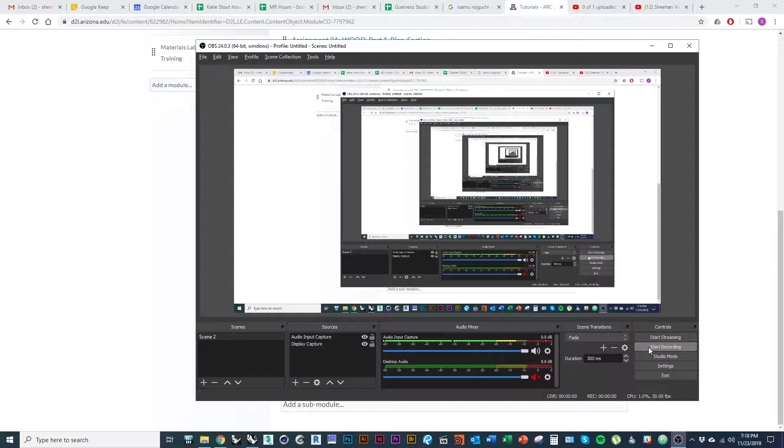Alright, so this is part 5, the last one in the series. Basically what I'm going to walk you through here is how to lay out everything else with the laser cutter.

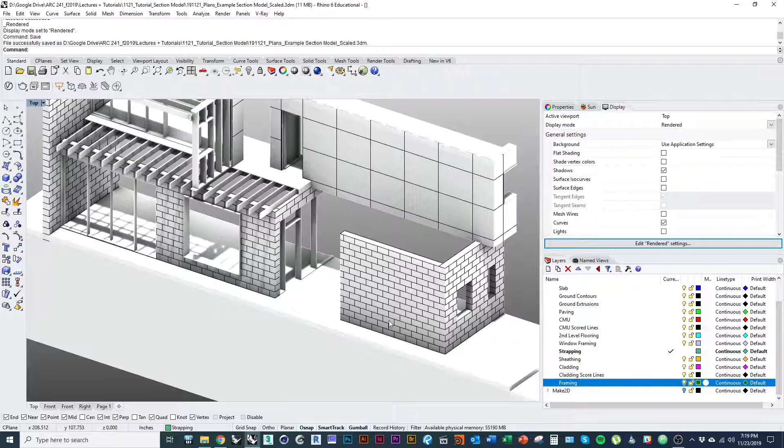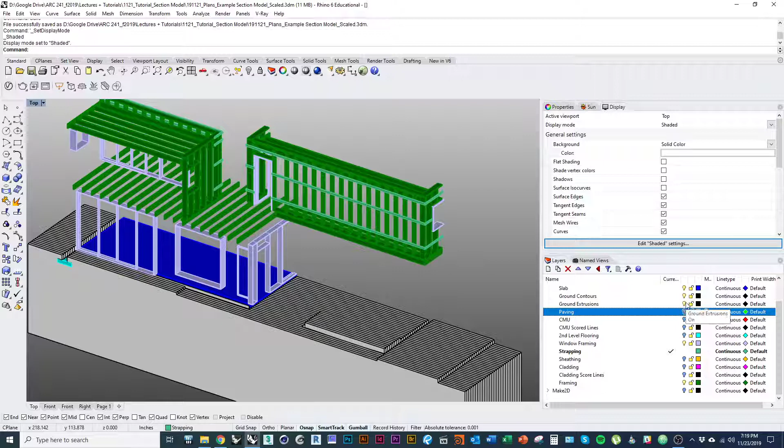As I mentioned a couple times in the past few videos, things like framing, the wall and ceiling and window framing, even the strapping - those are all things you basically just want to do by cutting sticks of a certain dimension and assembling them into frames, keeping them as square as possible. But in general, you're going to save tons of time by not trying to cut all these pieces out and keep track of which one is which length. So I highly recommend you just buy certain size sticks and cut them manually.

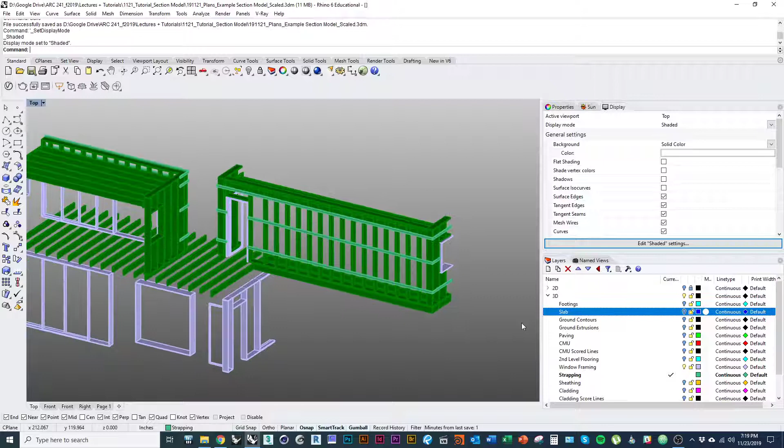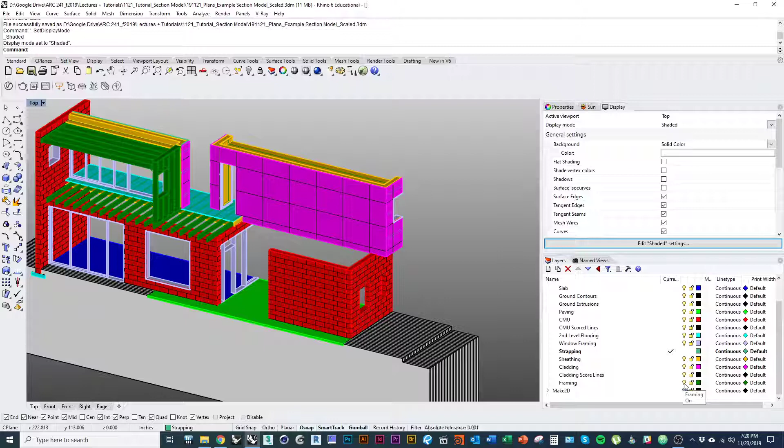So what I'm going to cover then is how to lay out everything else. Now I already covered how to lay out the contours that form that cardboard base, and I just want to reiterate that for anyone that might have missed it from the first tutorial. So I'm going to turn off everything that I'm not going to lay out as part of my framing.

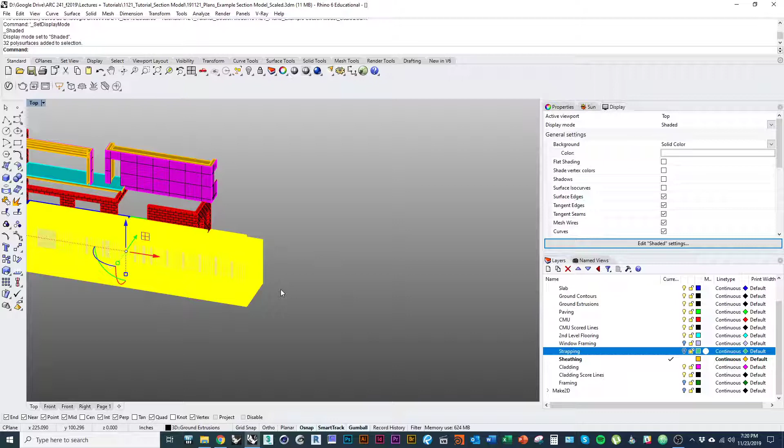And then strapping, where's that? Okay. Basically, most of what I'll do here will be just continuing in the same methods. So I'll show you a couple of different examples, but I'm not going to do every single part because that would just be massively repetitive.

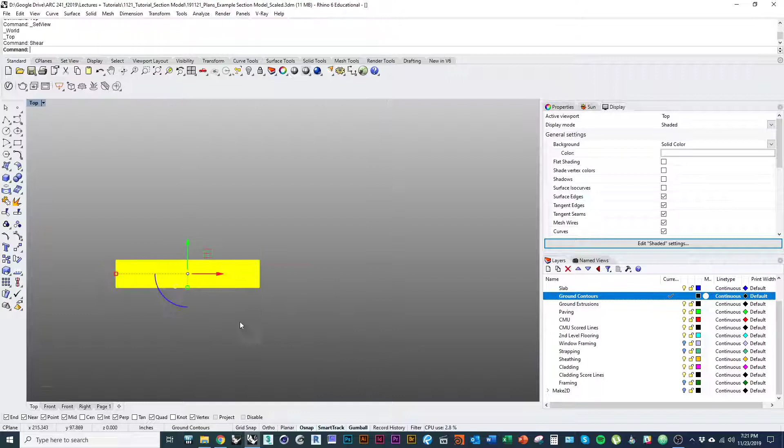Alright, so let me just reiterate how to do these ground contours. So I'm going to grab those. I'm going to use the command shear. So let me make a copy first, and again, I'm going to use the command shear.

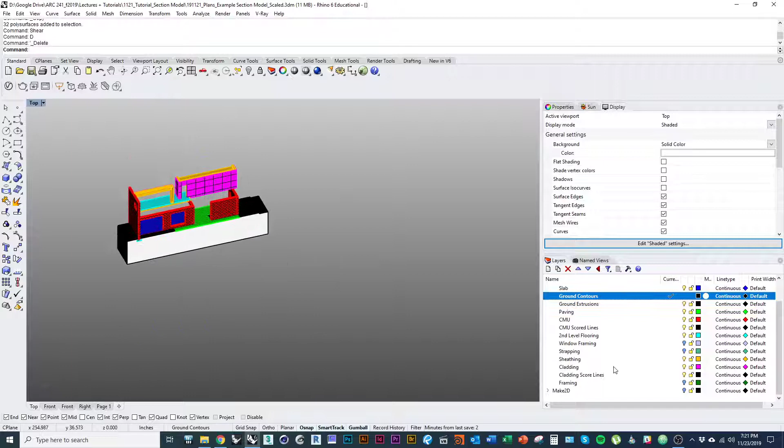So looking at it in top view now, I'm going to draw a line from one corner straight up, and then I'm going to start to... oh, I'm sorry, I did do this wrong. So let's see if we kept our surfaces or our outlines. I guess we didn't. So let me just do a quick thing here.

So this is why you want to save the lines that you make the extruded surfaces from.

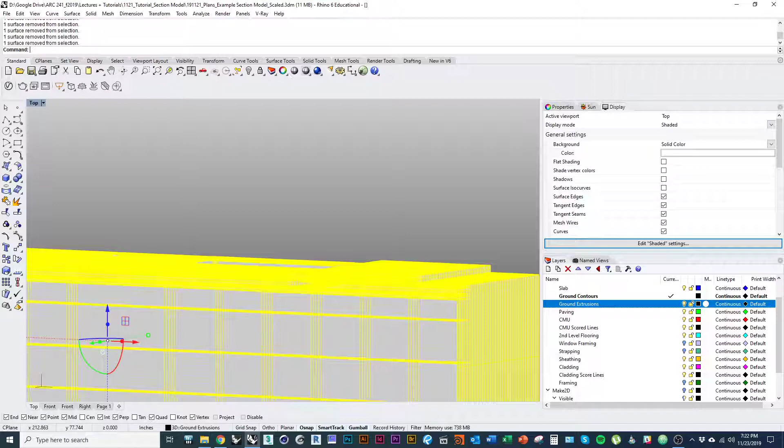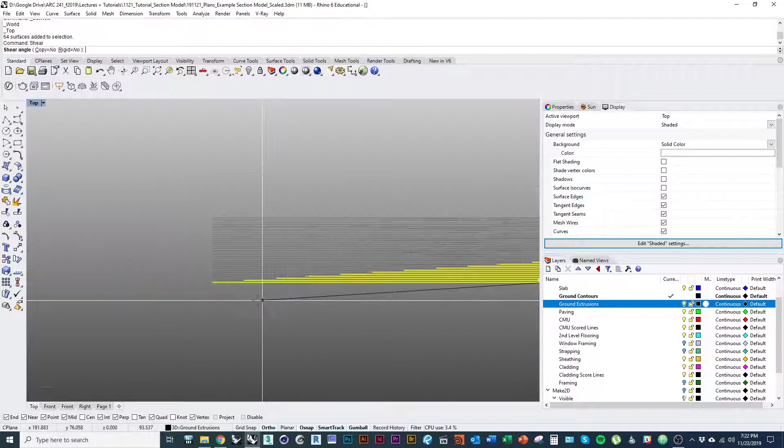Alright, but basically, if you had those things as 2D outlines, or in this case just the surfaces, then you would grab everything, use the command shear, go to one corner, drag a line straight up and click, and then drag a line straight out. What we're looking for here - and I'm holding Alt on the keyboard to avoid snapping to anything.

But at some point I will have sheared them far enough apart that they're not overlapping at all. And because they're only 2D surfaces, I'm not distorting the geometry, right? Like the direction of the shear was perpendicular to those 2D outlines.

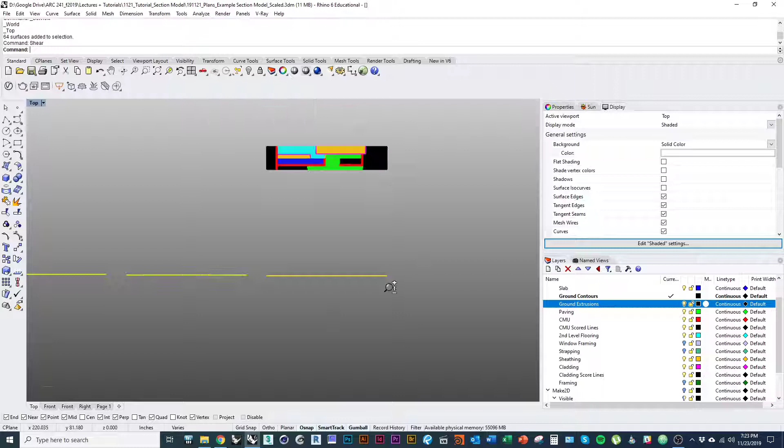And so now if I go into front view, I can pretty easily just say okay, make 2D. Again, I'm in front view. Oops, I should have done that properly. So obviously, everything you make 2D will only show up if it's in frame. So zoom out far enough that you can see everything, then do a make 2D.

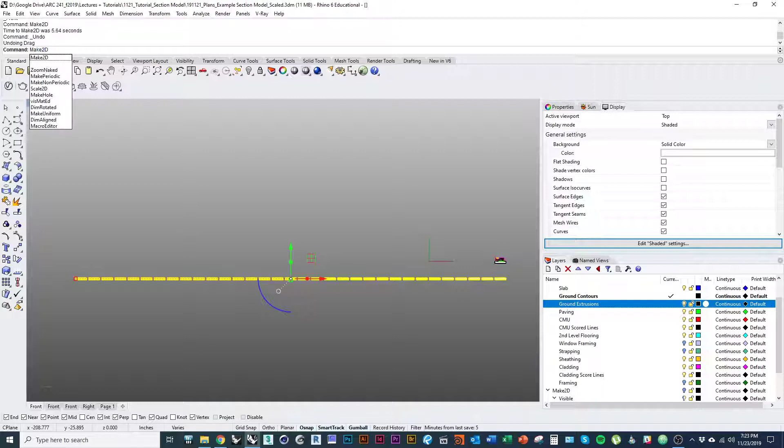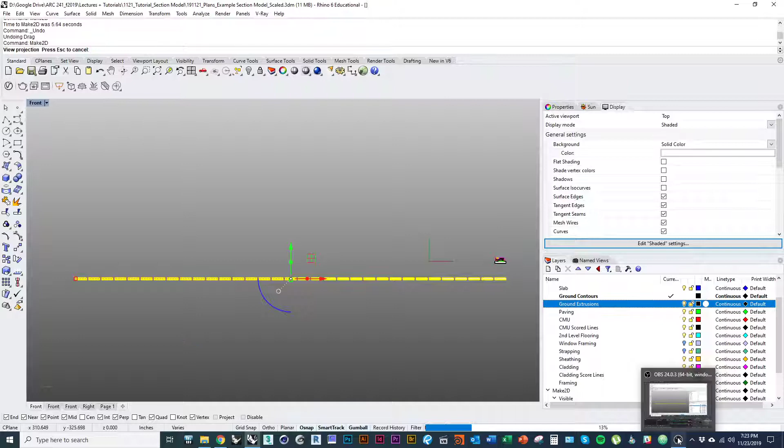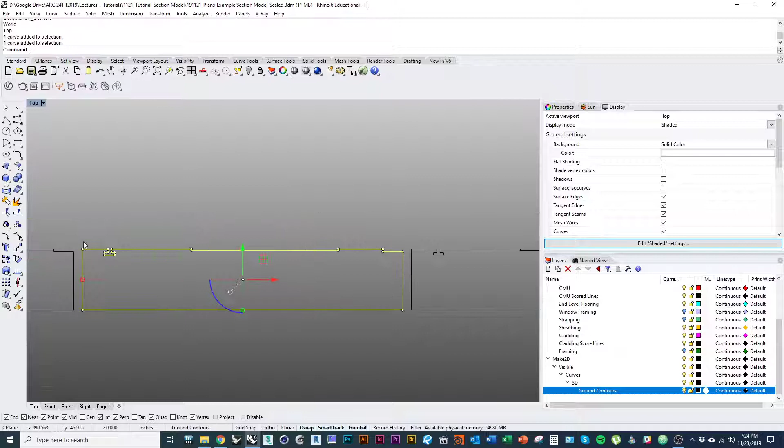Okay, and then under our layer make 2D, we're going to see those things. First of all, they're outlines, right? So there's 2D lines here. They're in top view, which means we can print them, and they're closed outlines, which is going to make our laser cut happen a lot faster and more efficiently.

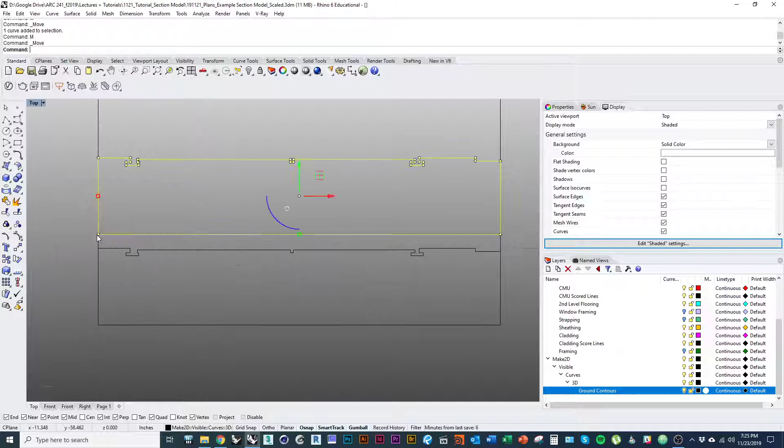And then what I would do also, of course, is make maybe a 32 by 18 window, and just start to lay them out in sheets. And you can even actually label them if you want. So I would just use the command text. I would say this is - I'll just use numbers, because that'll be the least amount of cutting. And then I'll just label them somewhere down there where I don't have to.

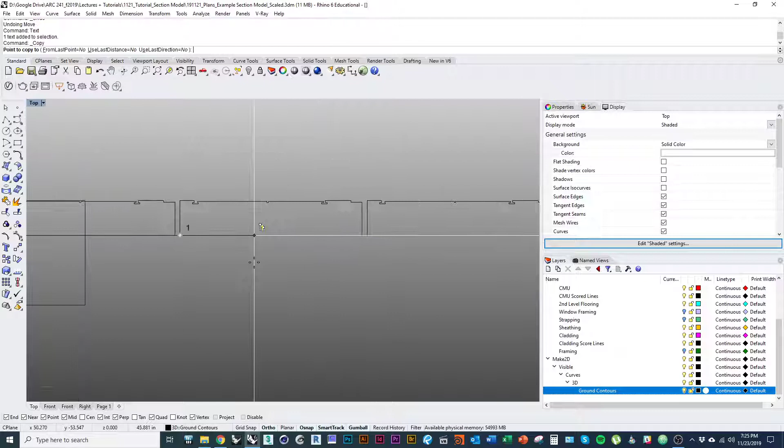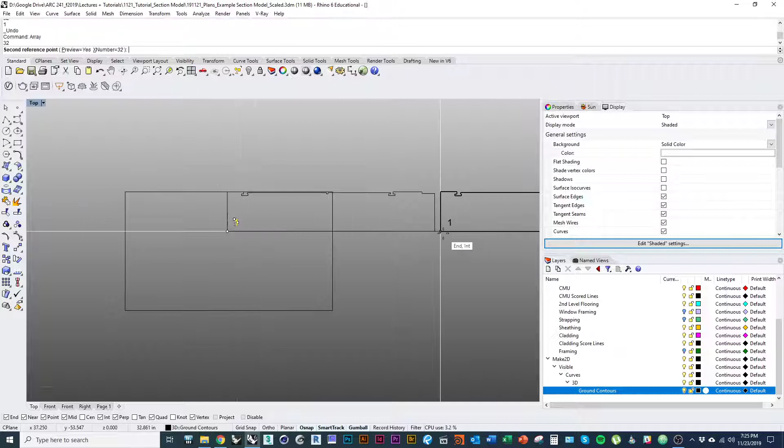And I can even actually array this. So in the X direction, I would want 32, obviously - that's how many layers I have. Oops, I didn't click, I messed up there. 32 - snap to the corner of one and then to the corner of the other. And then you could go one at a time, just double click on it to edit it. Shouldn't take too long.

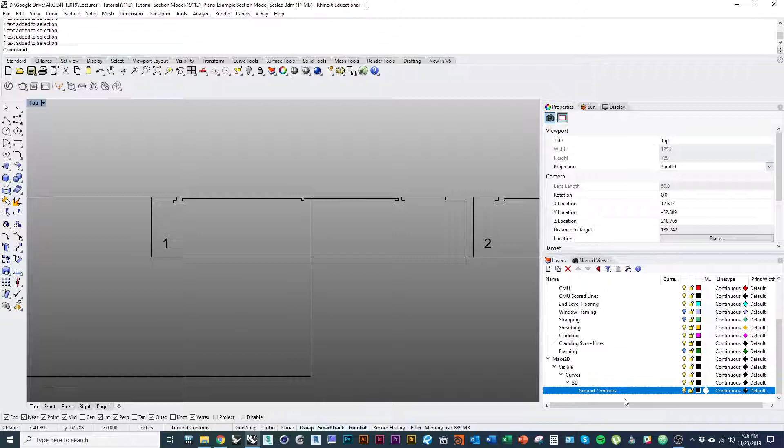And then what you would want to do is come back. So I'm sure you guys are aware by now that cutting on the laser cutter has to do with the colors that you use to define your lines. So I could set my outline to some color, and then I also would want to set my numbers here to a different color.

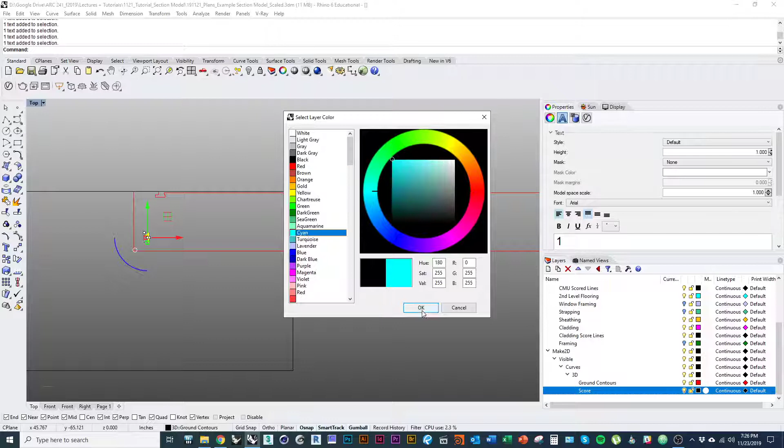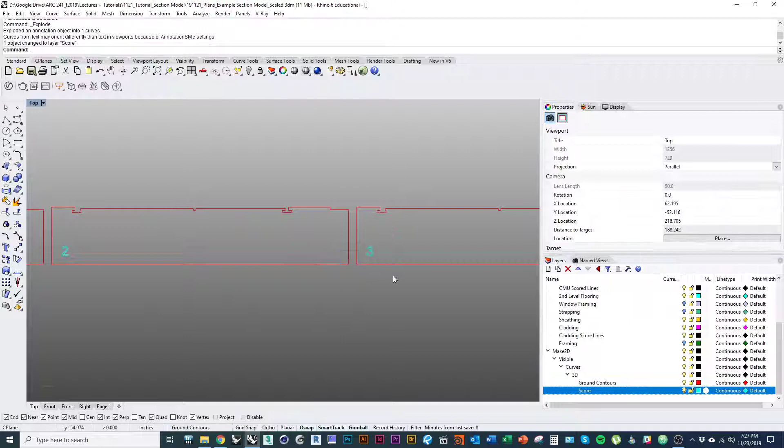So I'm going to make a new layer, call it score, set it to one of the colors that the laser uses. And then when I have these texts all defined, I'll just go in here and explode them, and then put them on that layer. That way I can set different settings for the numbers, and I can score those, just do them fast and kind of etch them into the surface without cutting them out.

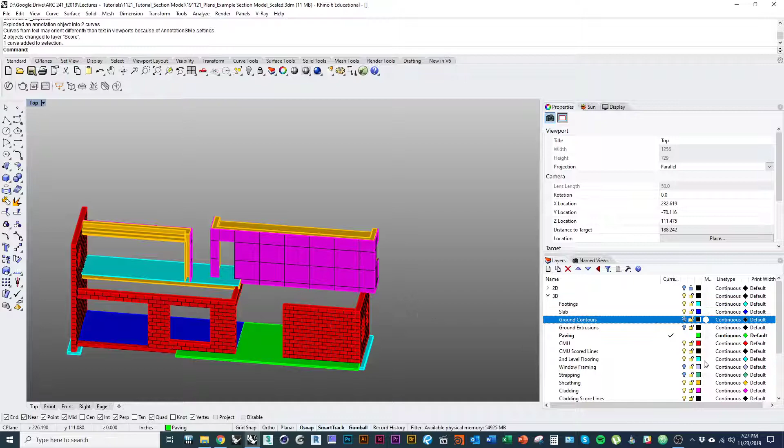All right, so that's the best kind of trick I know for laying out that type of base, those contours. The other thing I would say, for the most part, I would just kind of go layer by layer. Now, some of these things are going to be harder to lay out.

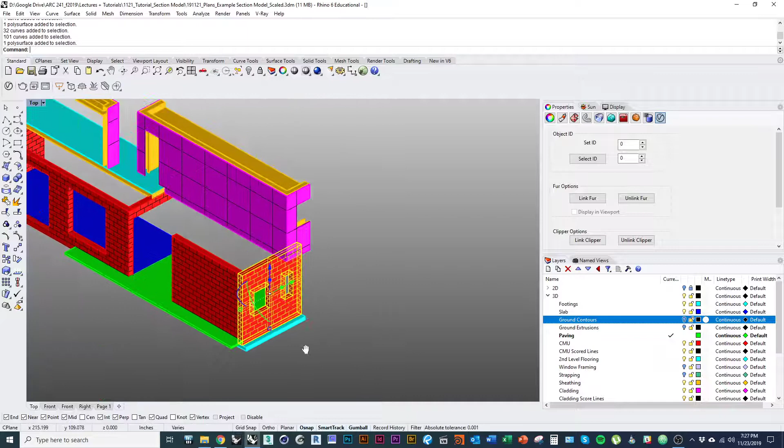Probably, okay, let's talk about these ones with scored lines on them. So what I would do if I had that, for example, and hopefully you remembered to group it when you drew those lines, but I would go object by object. I would use the command isolate, and then I would set my view to a projection where I can see just that object and the lines that I want to draw on it.

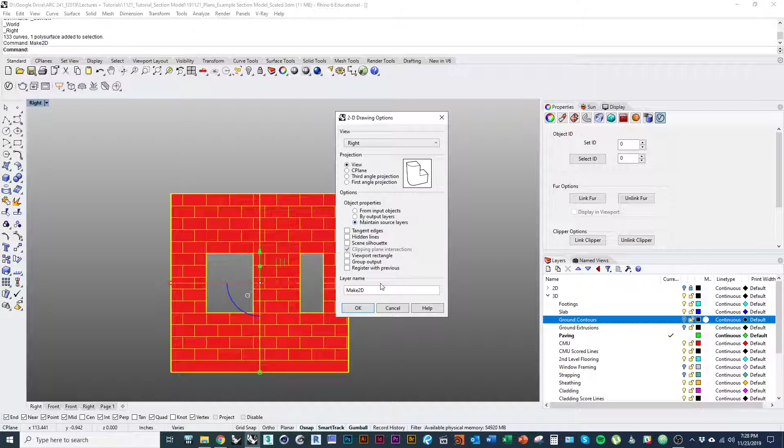And again, I would just go make 2D, and make sure I hit maintain source layers. And that's the fastest, easiest way to take something that, first of all, is a 3D object, and make it 2D. And second of all, has a lot going on, a lot of lines and stuff like that.

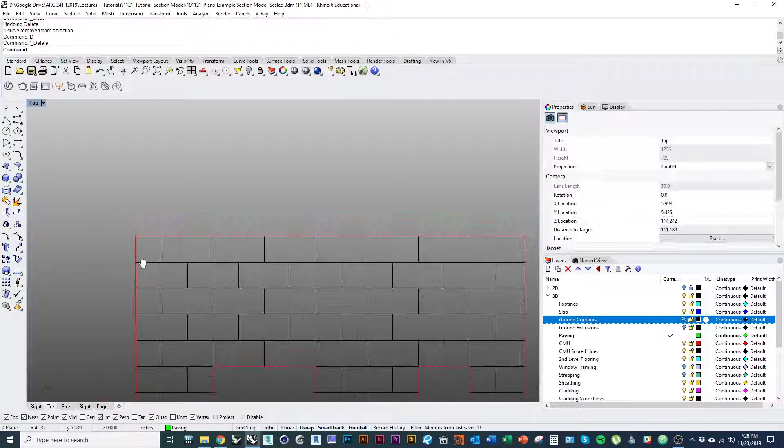You may find you still have to kind of clean a few things up, but shouldn't be too much of a big deal. And then you do want to be careful you don't have duplicate lines or anything like that.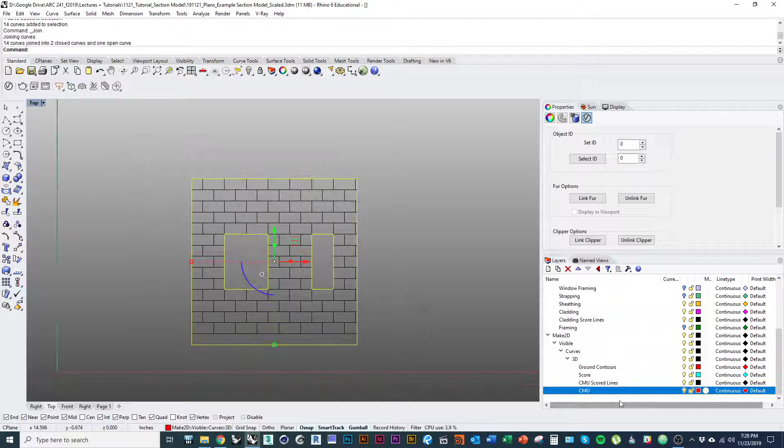And then, like before, I would put these on a separate layer. So I could go in here and just go select objects, join that. I want it to be red, so I'll keep it red. We don't have to put it on a separate layer, right? I misspoke. But we do want to give it the right color so that we're cutting it in the most efficient way. So I would go one by one and lay them out like that.

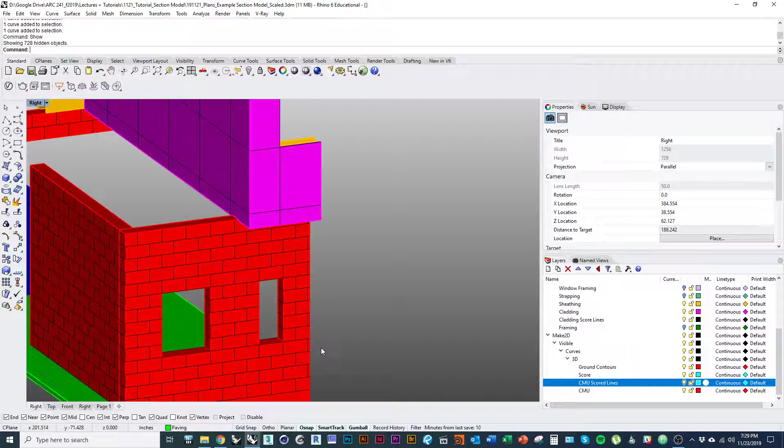Hit show to bring everything back. I'll do this surface as well. Let's go with cladding, score lines, invert, oops. Whoa, did not mean to do that. Select objects, isolate. All right, let me hide the rest.

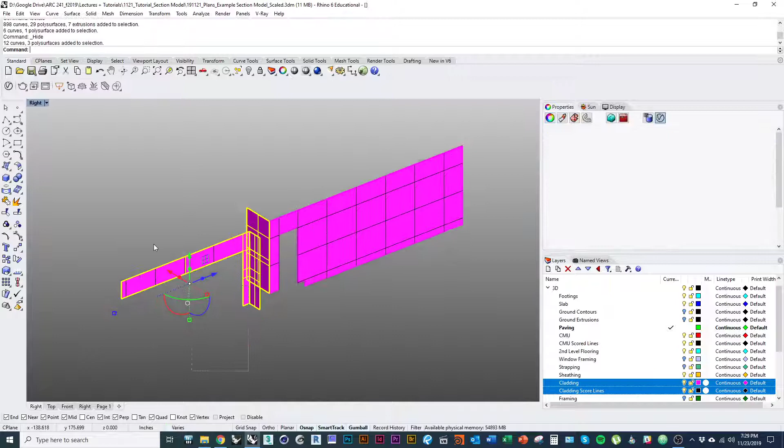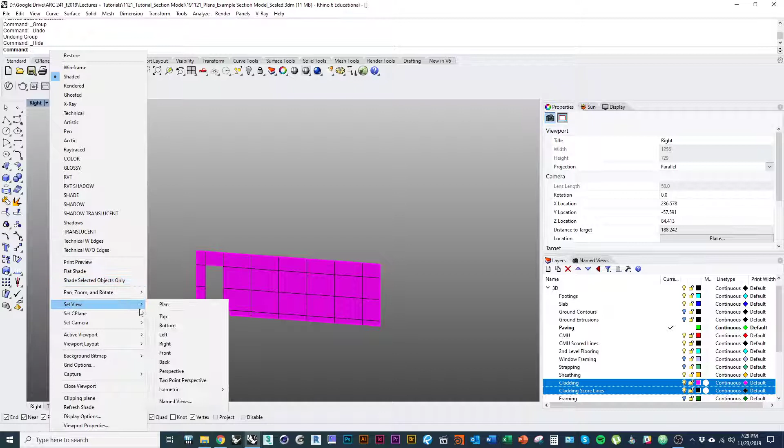So again, I would just go object by object and make 2D basically. I could go, and I should also point out, you really want to make sure that you're not looking at something backwards. For example, this is the outside face of this geometry, and we can easily make it 2D from here, but then our score lines would be on the wrong side. So I want to make sure I'm looking at it from the right side. There we go, okay. And again, make 2D.

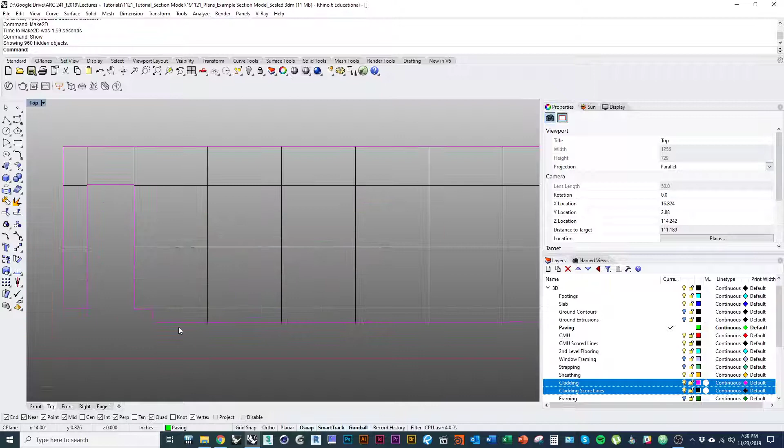And like I said, I would keep my layers all the same. In other words, don't put everything on like cut, score - don't put everything on the same layer. Just change the colors so that I can be sure I have all the parts that I need and so on.

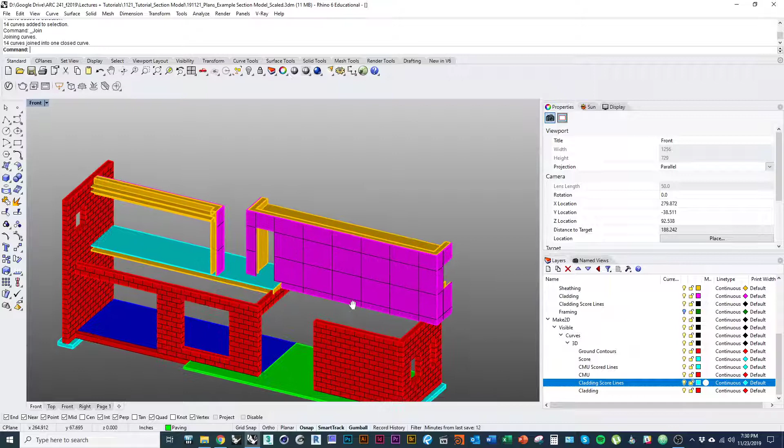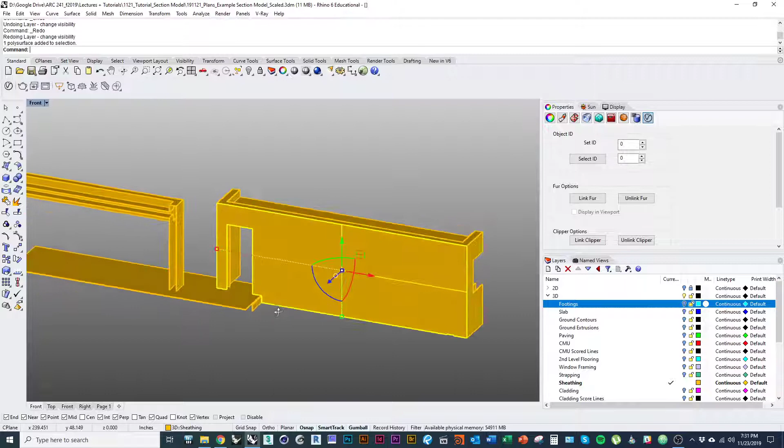All right, and then finally, let's talk about the sheathing a little bit. That's probably your most complex kind of layer that you need to lay out. Everything else I would pretty much just do the same. But this one, because there's so many different little surfaces, it's going to be really hard to go one by one and do make 2D and all that stuff. It's going to be a real pain.

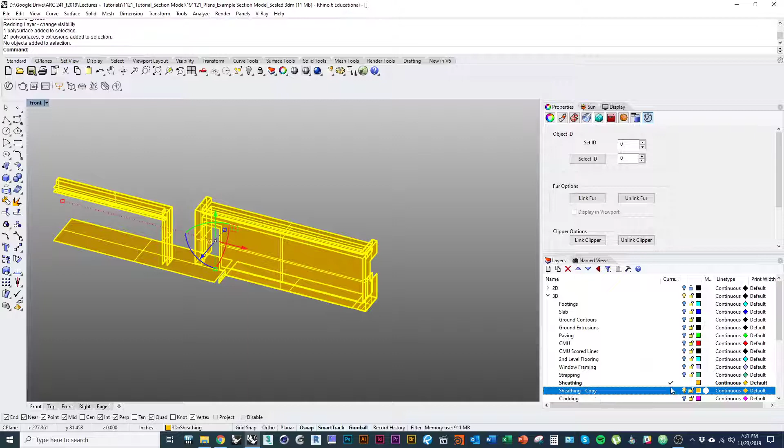So what I would do instead is basically make a copy. So I'm going to select these objects, I'm going to just duplicate the whole layer. Select sublayer, duplicate layer and objects. So I'm going to set that as my current, and I'll just change the color a little bit so I can tell the difference. All right, and then I'm going to explode everything. So we modeled everything with a thickness, obviously, so we could kind of sort out how the corners would go. But then basically what I want to do is reduce everything to one surface or one outline.

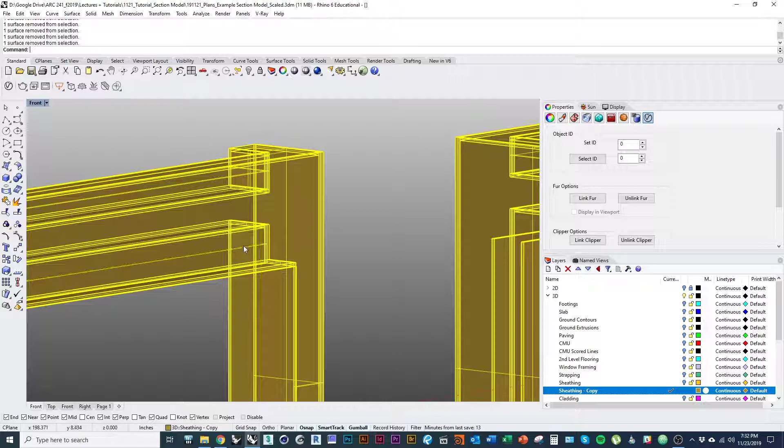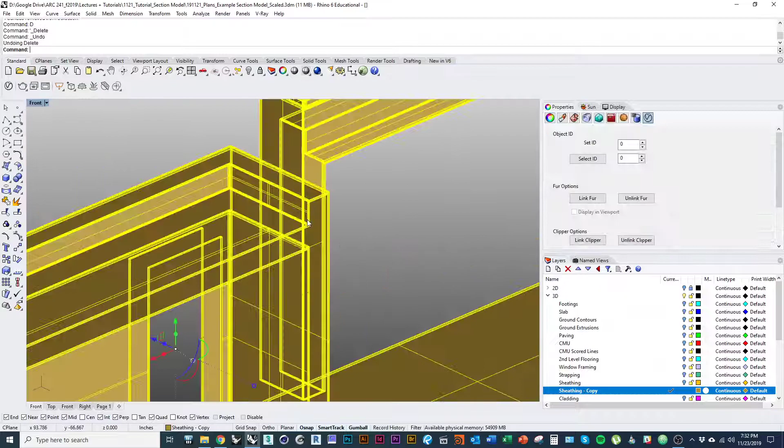See how when I explode it, there's two faces of each of these geometries? Let's select and delete it. So we missed one there. Missed one there. And there. Alright, great. Got a couple duplicates, but that's okay. So basically those are all the things I need to lay out. Now they should be, if I select them all and type direction, as long as I didn't delete the wrong face.

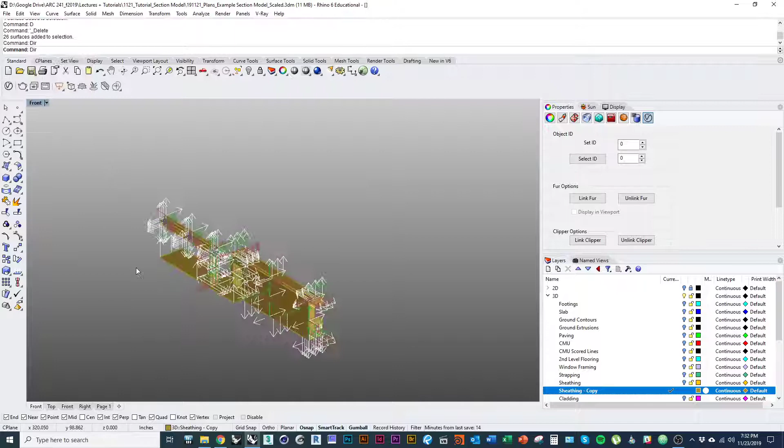I want to have basically the face that I want to cut from. And again, it doesn't matter too much with the sheathing because there's no score lines on it. But oops, I missed one. There's somewhere there.

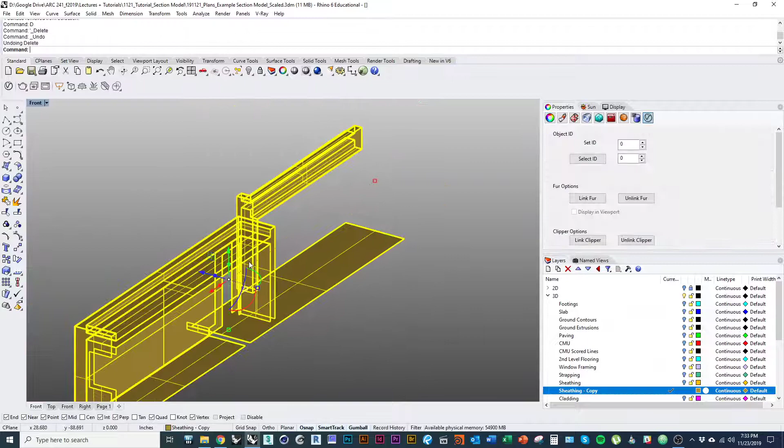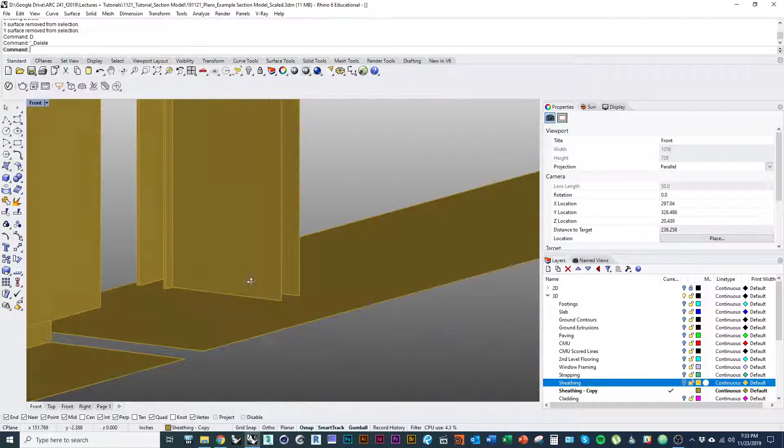And that's why it's good to copy too, so we can just make sure. So I missed that one too. So as long as we kept all the surfaces that form the outside face, and again, we can check that by using the command direction. Just type dir and it'll show you by arrow which side is facing up.

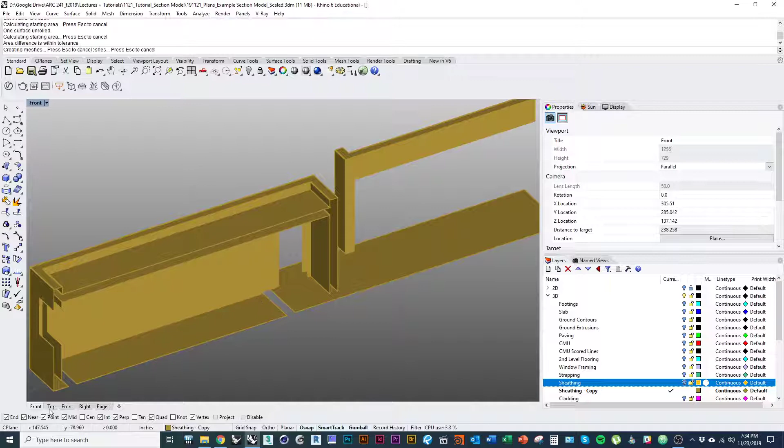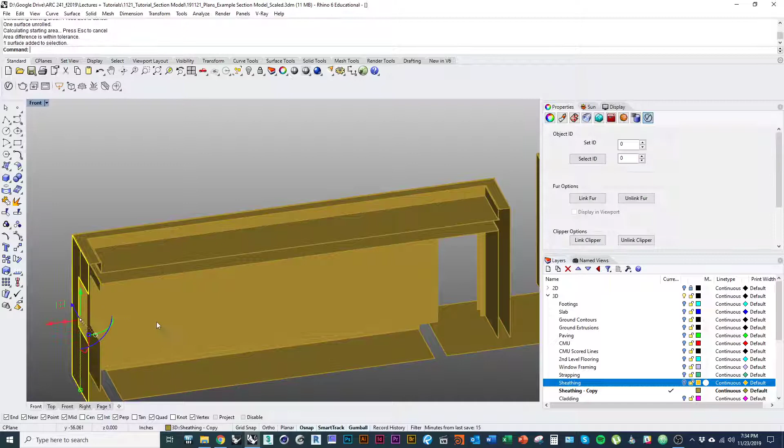And then we're going to use a command called Unroll Surface. And because these are all 2D surfaces now, what that's going to do for us is just lay them all out flat. Now, what's great about that is we can do a bunch of them pretty fast, so we don't have to sit here and go through each one.

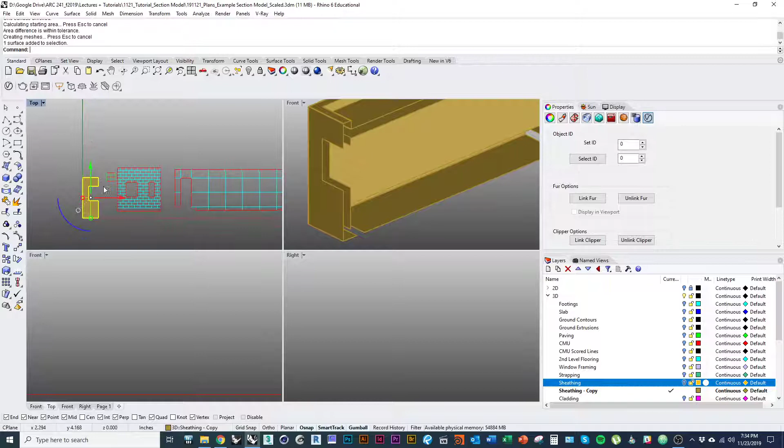Let me just show you, so as I'm unrolling these, they're all kind of... I guess I should actually be doing this with 2 windows. So for example, if I unroll this guy, it appears in my top view near the origin. Okay, so then I would just go one by one, and I would kind of lay them out in a way that I can keep track.

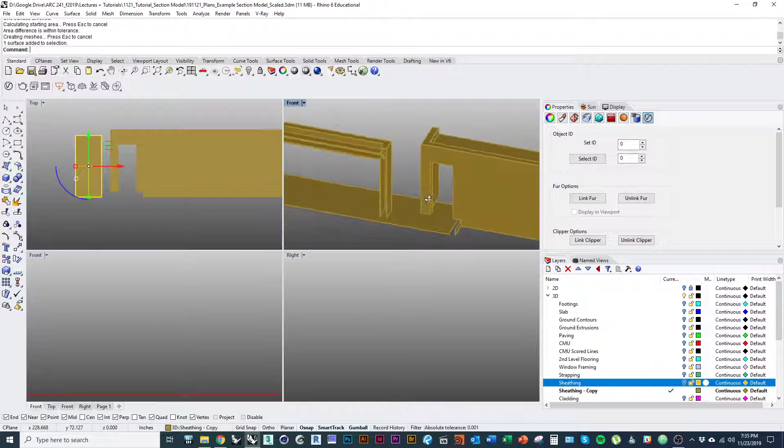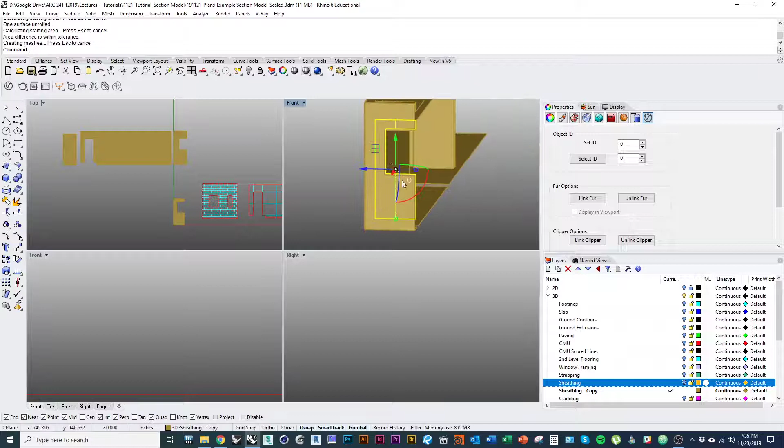And the reason I was showing you that direction trick, it's only going to matter for things that aren't just rectangles. But for example, if we look at this surface, this surface is facing out. So if I unroll this, the way I'm going to see it is from this side, from the side that's facing out. However, that is not the side that we'd actually see in the model. We're actually looking at this side.

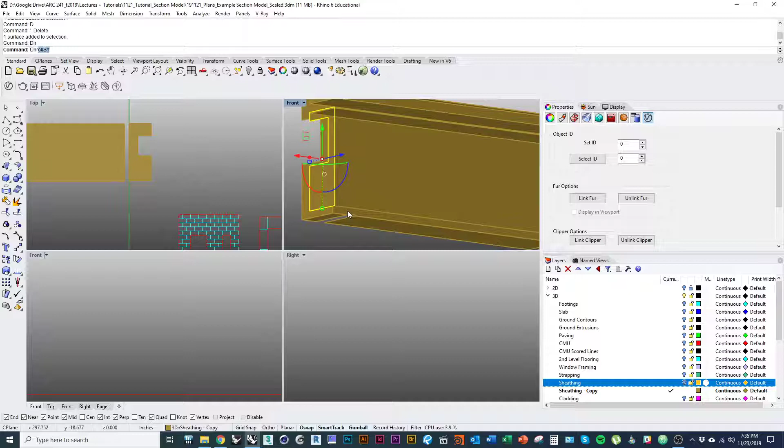Now, because of the way the laser burns, it'll especially matter for where we have scoring. But if we just go in here and go direction and flip that guy before we unroll it, it'll give us the right side facing out. So we just flip it. That is, we're seeing the side that we're going to actually see facing out in the model, in the physical model, because we have the kind of orientation set right.

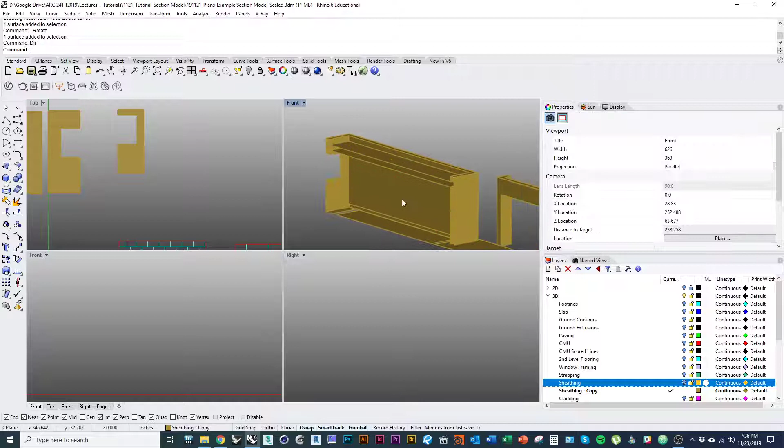Now for the rectangles, obviously it doesn't matter because you could flip them and they'll work the same. So we could use the front as the back and vice versa. And let's see.

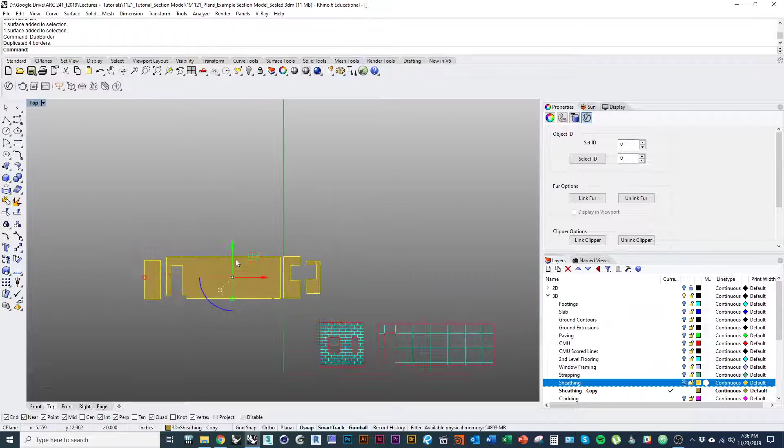Oh yeah, and then the final thing to do here, once you had them all laid out, just like we did before when we were modeling the window frames, I would just say DupBorder. Select all the objects, and then boom. And we could put that on a layer where we have them in red, so it'll cut. And then lay your stuff out on your sheets.

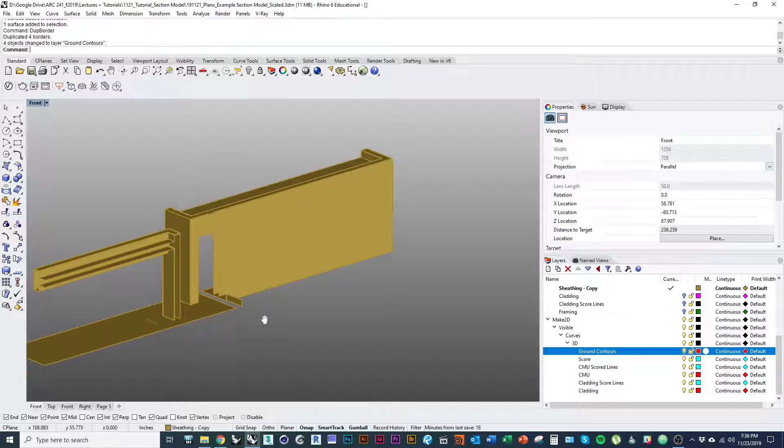That's basically going to be the best. Those methods are going to be the best for kind of laying out the parts, assembling them, or organizing them on sheets, labeling them. Again, for most of the stuff, I would just lay it out in a way where you can keep track of the order of how things go.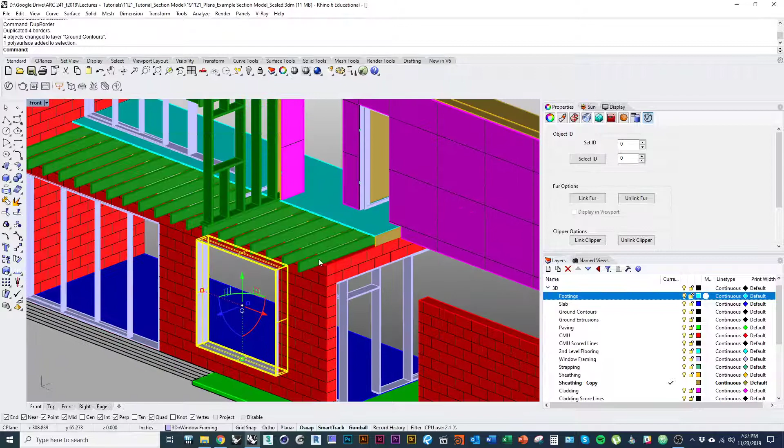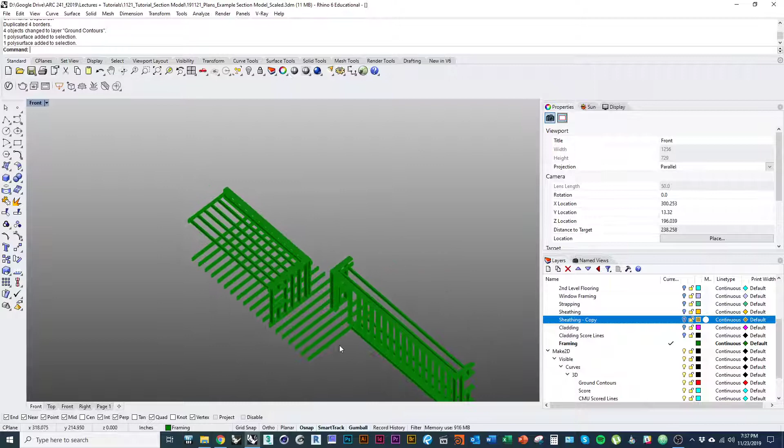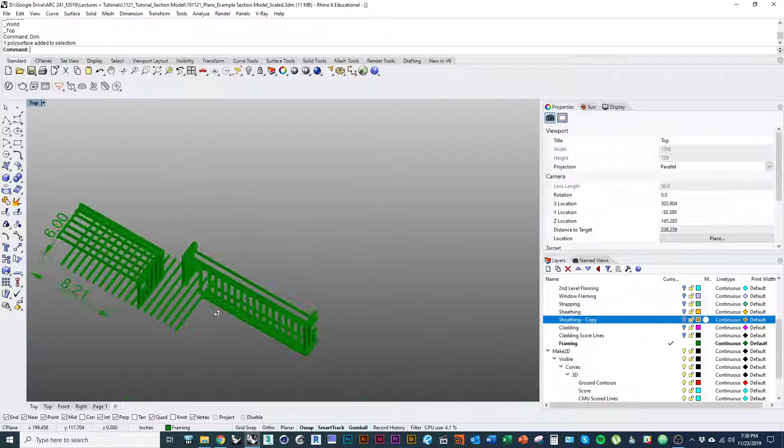Yeah, and I think, for most of these, like framing elements, you'll be able to just come into your model and measure things. So, if we were to try to do all our framing, I would just strip my model down to that, go in here and add a couple of dimensions, you know, like that's obviously 6 inches. That's whatever, 8.2, blah blah blah. Anyway, so just go through and kind of dimension things, and then you can easily cut them.

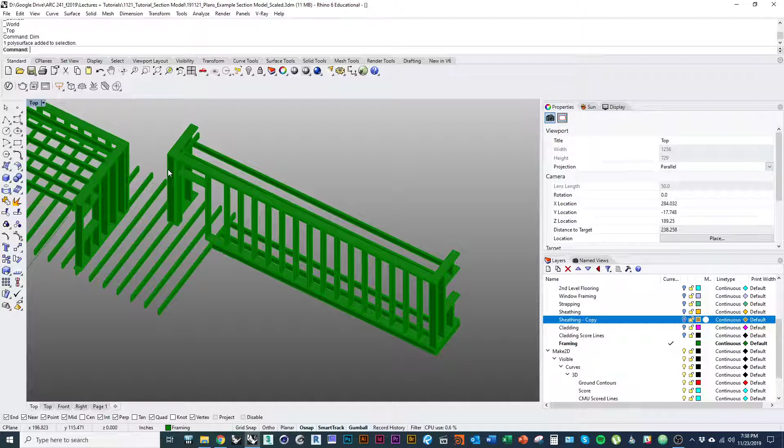Lay them out. So that's going to wrap up the laser layout tutorial. And the next series of videos are going to cover, building on this, how to make a digital model of the whole project, and use that as an environment to make our section perspective renderings from. All right, that's it.